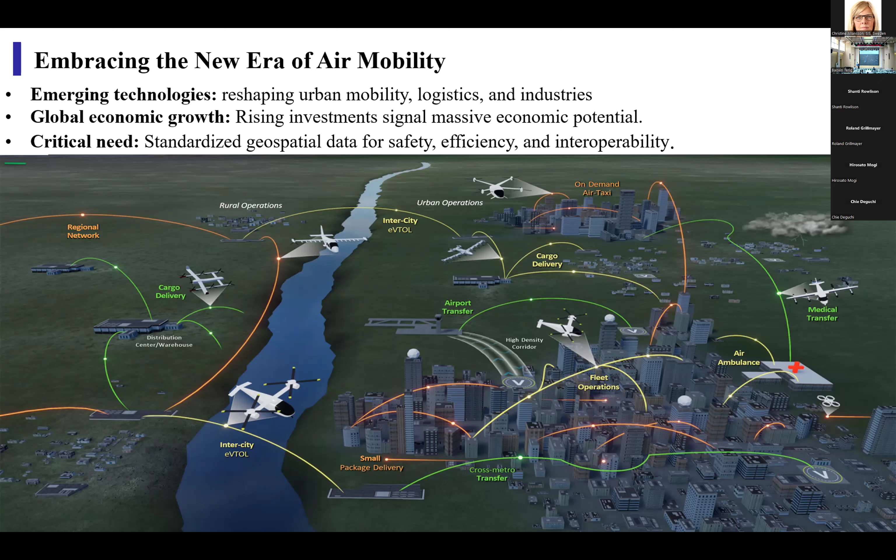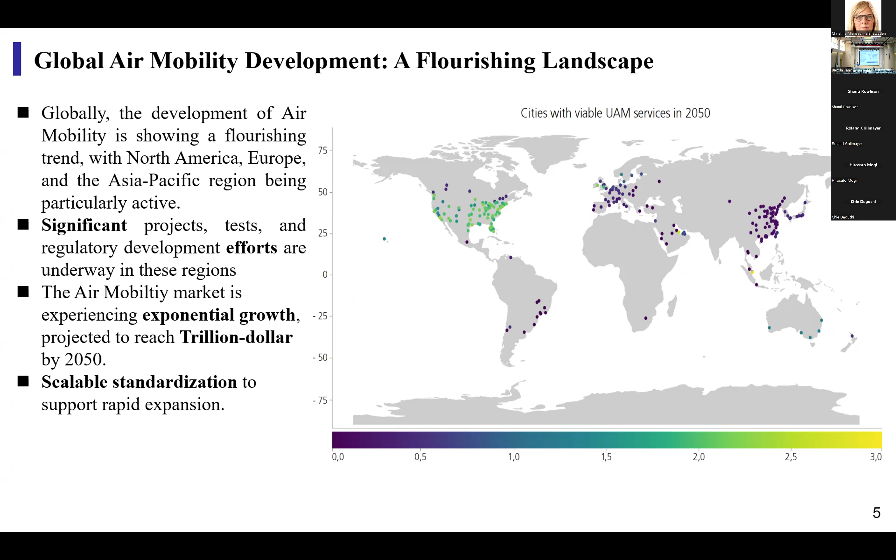Despite the growth in low altitude air mobility, the market remains in its early stage with significant regional disparities. The US, Europe, and Asia are developing divergent regulations and standards, posing challenges to global interoperability. Harmonized international standards are essential to overcome these barriers and enable seamless cross-border operations. While the ISO 19100 series provides a robust foundation for geographic information management, we must acknowledge that its generality presents certain limitations when addressing the unique challenges of this emerging field of urban air mobility. The core objective of this report is to delve into these shortcomings and propose specific recommendations for extending existing standards or creating new ones.

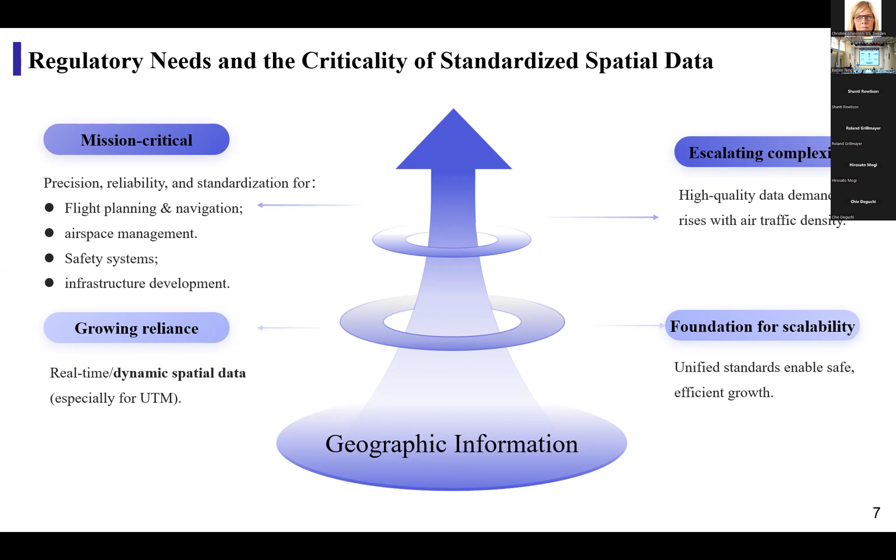Second, let's see the limitations of ISO 19100 series for global air mobility. The operational environment for urban air mobility is a complex three-dimensional space involving various elements such as buildings, flight corridors, and vertiports. The existing ISO 19107 standard faces certain challenges in modeling these intricate urban airspace structures with sufficient detail and precision.

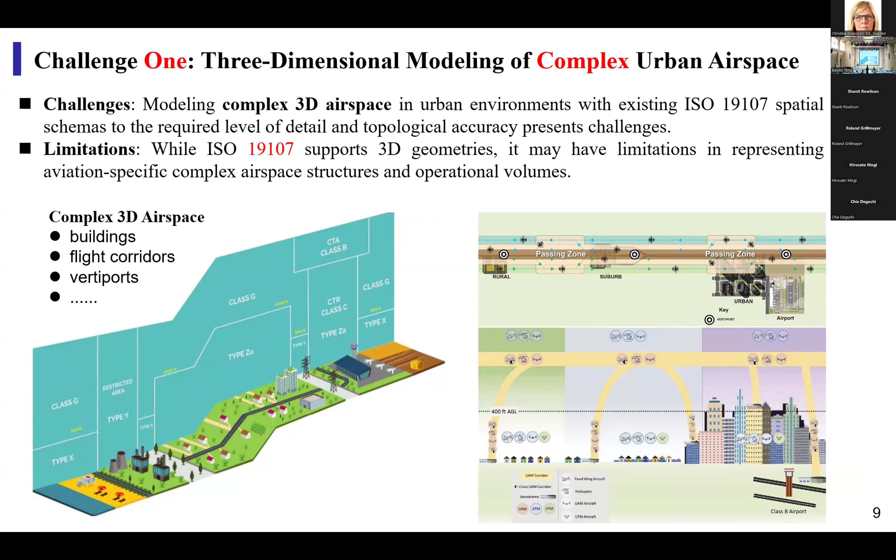The current ISO 19100 series has limitations in effectively modeling the highly dynamic airspace, including temporary restrictions, no-fly zones, and real-time traffic information, which are crucial for UTM. In addition to basic temporal reference, more complex temporal patterns are needed to capture the dynamic characteristics of airspace availability and usage. Although ISO 19108 addresses the temporal aspects, it may not provide the granularity and specific structure required for the rapid and frequent updates peculiar to UTM operations.

ISO 19108 focuses on the temporal characteristics of geographic features. However, the airspace in UAS UTM is not just a feature with one time frame, but an entity whose availability and restrictions may change rapidly and unpredictably according to various operations and safety factors.

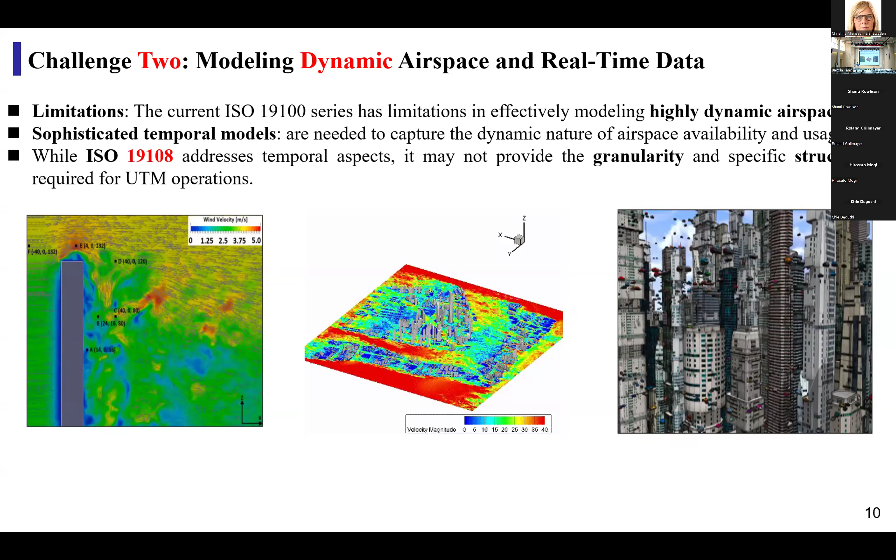The ISO 19100 series lacks specialized standards for cataloging elements and infrastructure specific to UAS and UAM, such as vertical takeoff and landing airports, charging stations, communication networks, and designated flight corridors. A standardized approach is needed to define the attributes and relations of these unique elements. The UAM and UAS UTM ecosystem relies on infrastructure and elements not commonly found in traditional GIS applications. The current ISO 19100 series lacks standardized methods to define and catalog these unique elements, thereby hindering data sharing and interoperability within the field.

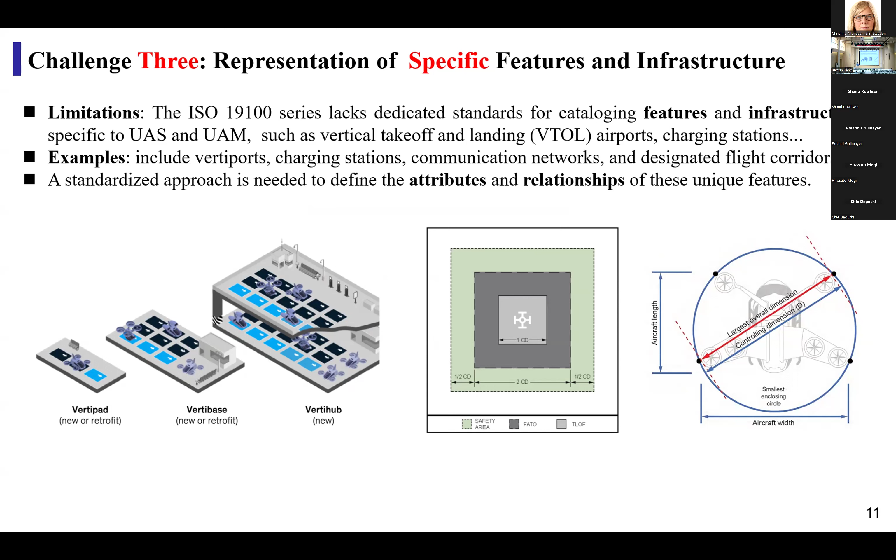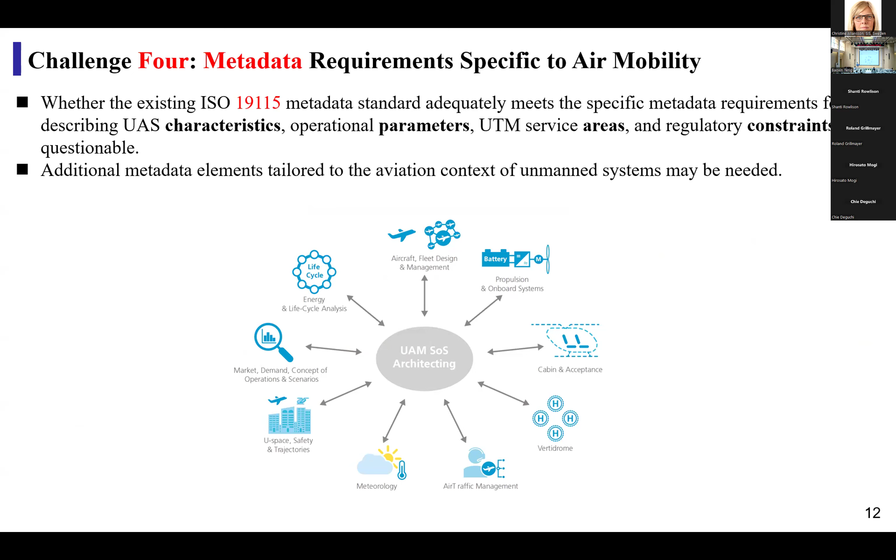Effectively managing and discovering data related to unmanned aircraft systems, urban air mobility, and UAS traffic management requires comprehensive metadata. While ISO 19115 provides a good foundation, it may need extension to include specific details such as the exact model of UAV or drone, its operational parameters, and the coverage area of UTM services.

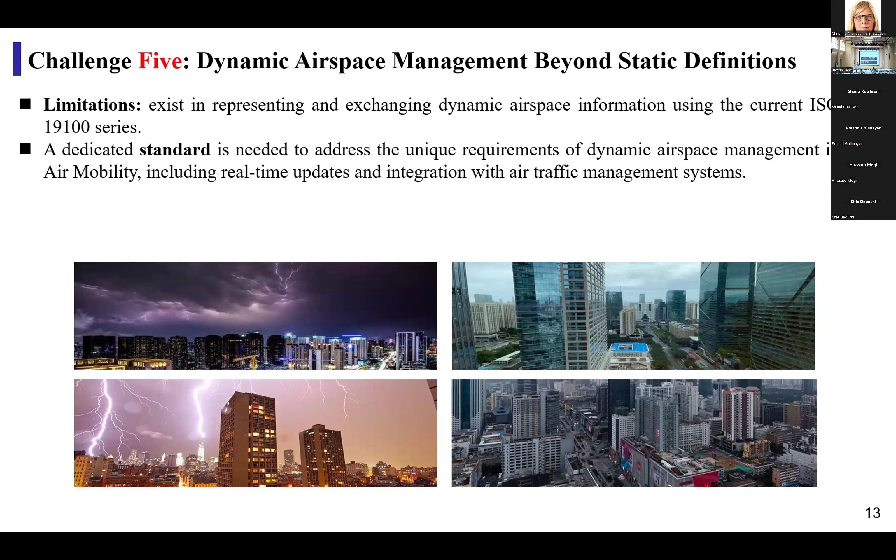The airspace environment for UAV and urban air mobility is often dynamic, with restrictions and availability changing rapidly based on operational conditions. The existing ISO 19100 series lacks dedicated standards to handle this dynamic effectively and support the exchange of real-time airspace information, which is crucial for safe operations. Third, proposed extensions.

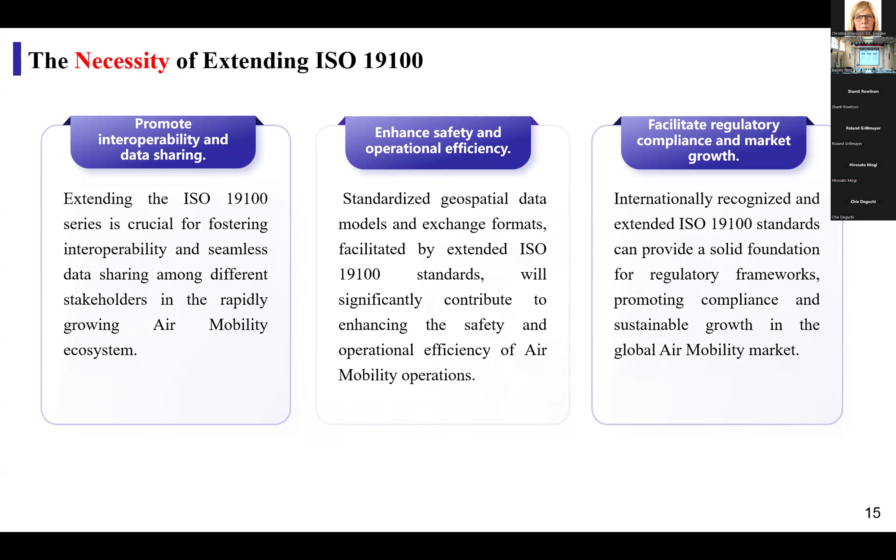Given the limitations discussed, extending the ISO 19100 series of standards becomes paramount. This facilitates data interoperability between different systems and actors, enhances the safety and efficiency of operations, and provides a solid standardization foundation for the healthy development of the global market.

Extension 1: to effectively model the complex three-dimensional urban space where UAM and UAS operations occur, we recommend extending the ISO 19107 spatial schema by introducing specific geometric primitives and topological relationships tailored to aviation needs.

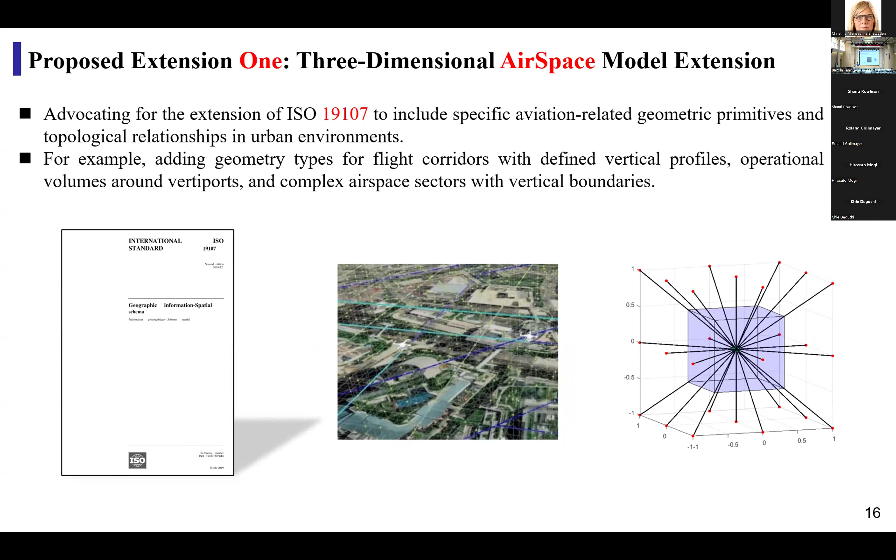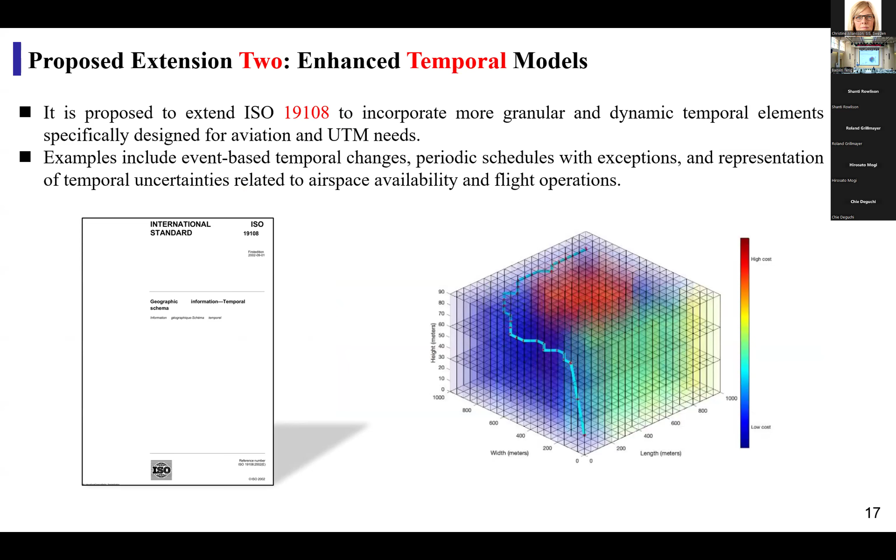Extension 2: to better represent the dynamic nature of airspace and flight operations in the air mobility domain, we propose extending ISO 19108 to incorporate more refined temporal concepts such as event-driven changes and flexible scheduling.

Extension 3: to ensure effective data discovery and management within the air mobility domain, we recommend extending the ISO 19115 metadata standard to include specific metadata elements uniquely describing the characteristics of UAV and UAM operation parameters and UTM service details.

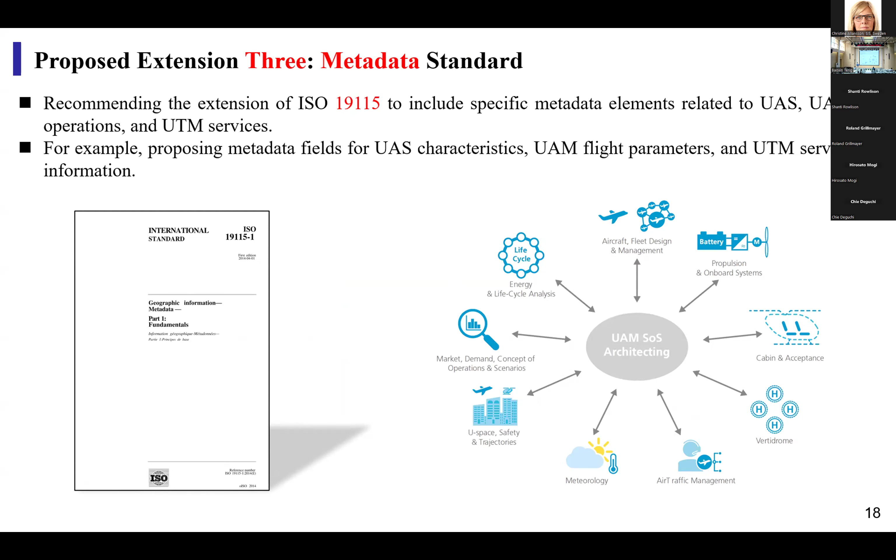Extension 4: to provide location-based services for air mobility, we should add extensions to ISO 19132, such as a UTM-specific viewpoint service; upgrade ISO 19133 to provide interfaces for ADS-B traffic surveillance integration; and adapt ISO 19134 for airway networks.

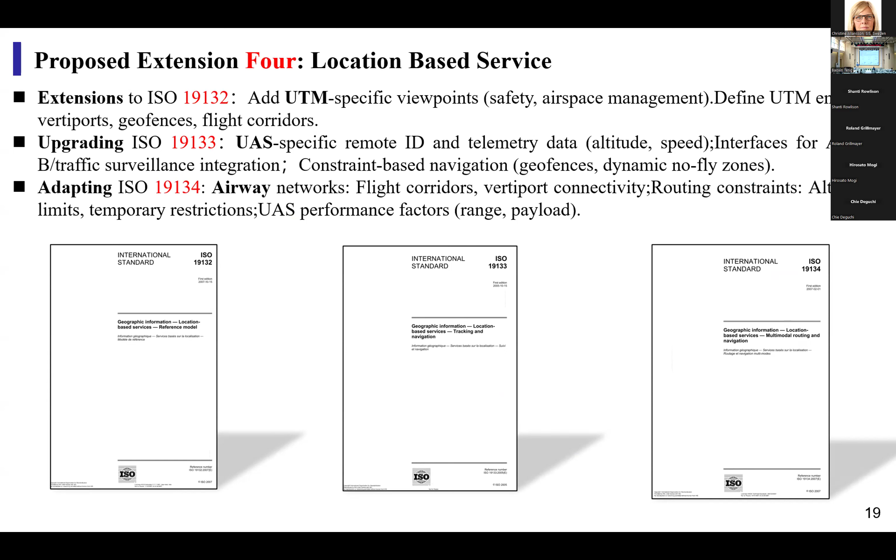To address the critical need for managing dynamic airspace in air mobility, we propose developing a new ISO standard specifically for this purpose, defining data models for representing temporary airspace restrictions and real-time traffic data, and ensuring seamless integration with existing aeronautical information systems.

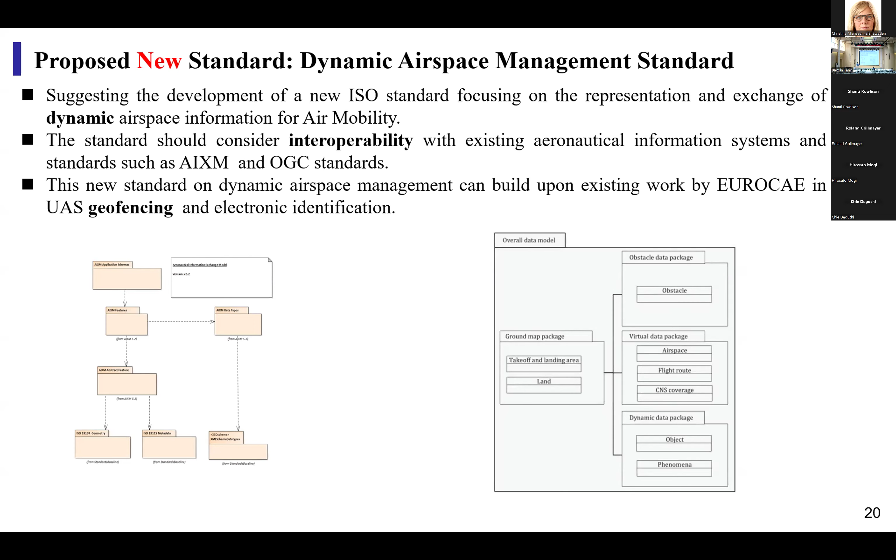And last, collaboration is key. The development of these extensions and new standards should not occur in isolation. Collaboration with other key standard bodies such as OGC and the European Organization for Civil Aviation Equipment is crucial to ensure alignment, leverage existing expertise, and avoid duplication of effort.

In conclusion, extending the ISO 19100 series through our proposed enhancements to temporal and spatial models, the development of a dedicated feature catalog and metadata standard, and the creation of a new dynamic airspace management standard are crucial steps in effectively supporting the global development of air mobility.

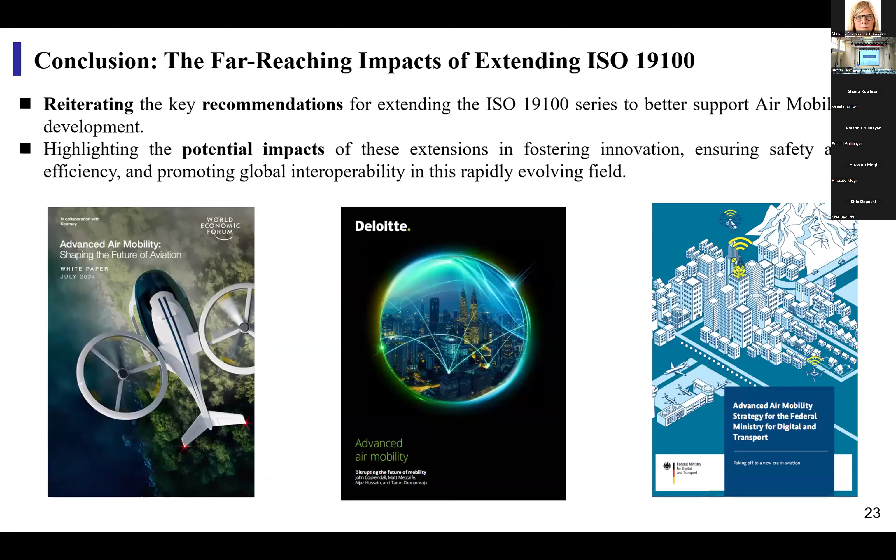At last, we urge ISO TC 211 to consider these proposals and initiate the necessary work to develop and implement these extensions and new standards. We also call upon all experts and stakeholders to actively collaborate and participate in refining these recommendations and working together to establish a robust and future-oriented standardization framework for the exciting field of urban air mobility, unmanned aircraft systems, and UAS traffic management.

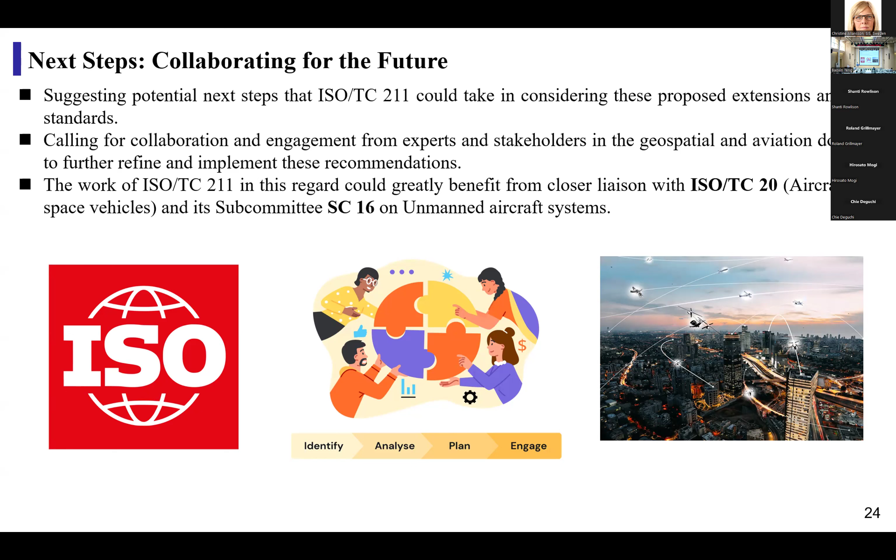And last, we have the national project of China to support this research. This research includes urban modeling and information extraction for low altitude flight, temporal information acquiring services, environmental risk assessment, and system development.

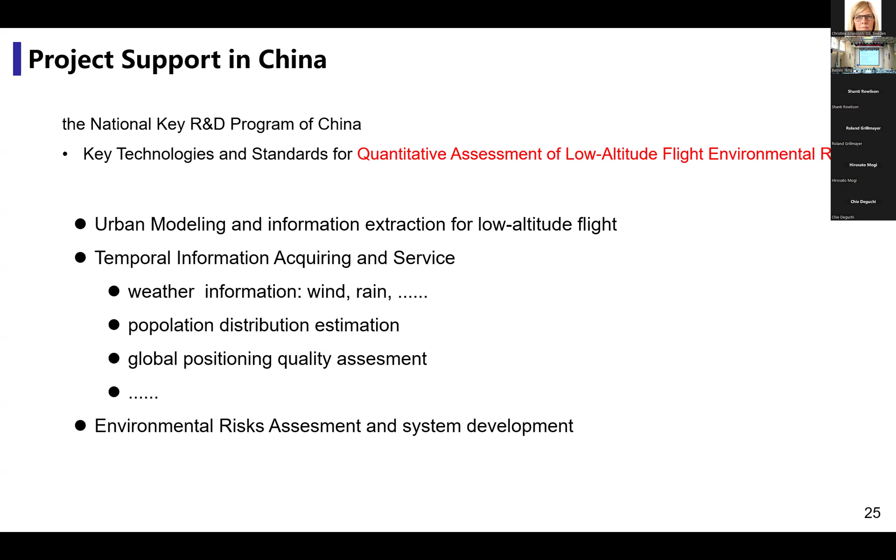Okay. Okay, thank you.

If you are interested in this topic, please contact me and let's make a contribution to air mobility together.

Okay. Okay, thank you. Thank you. Thank you very much.

All our standards at ISO are under a 5-year revision process. If there's anything significant that comes up before then, we will consider it. So I would suggest the best way to take some of this forward would be to work through your National Standardization Committee, and they would work towards TC 211.

I do take the point regarding flight corridors. Something like 19107 was originally written 20 years ago or so, and we were concerned about 2D spatial data at that point. Yeah, it's now into 3D, but you're probably right, it probably doesn't consider things like flight corridors, which is a very complex world. But yeah, do reach out.

Okay. Does anybody have any other questions on that? Yep, Scott.

Have you looked at the ANSI document, the ANSI UAS standardization collaborative roadmap of potential standards? Okay, so I'm going to write this down and I will send that to you because it covers a lot of these same standards. Yes, and it's very American-centric, but some of the ideas are uniform, and I'll send that to you.